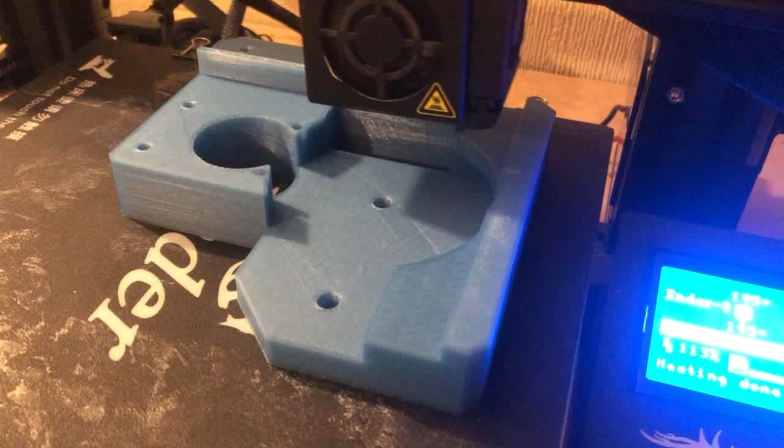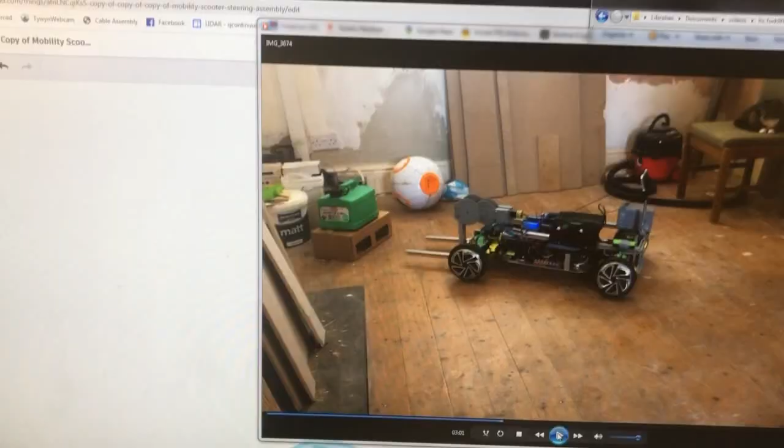Okay, so in this one we're going to be improving the forklift that we had on the last hoverboard video. So as you can see, as it's moving, if we just get to it, yeah, you can see that it tilts and rotates. So it can't place things on top of each other. It can only lift stuff up and move it around a little bit.

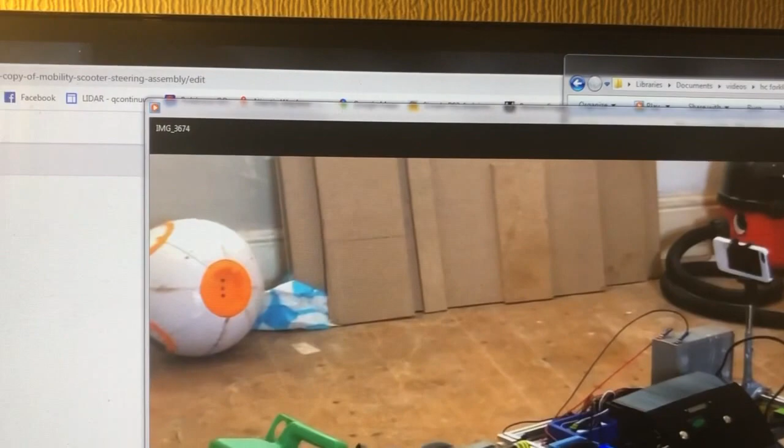Yeah, so as you can see, when you lift things up, it tilts back. You know, that's not how a forklift works. I mean, it depends on what sort of stuff you're going to be lifting. But I want to be able to give myself options. Like, say if I want to stack these things that I'm lifting up, if I want to make tidy piles, that kind of thing.

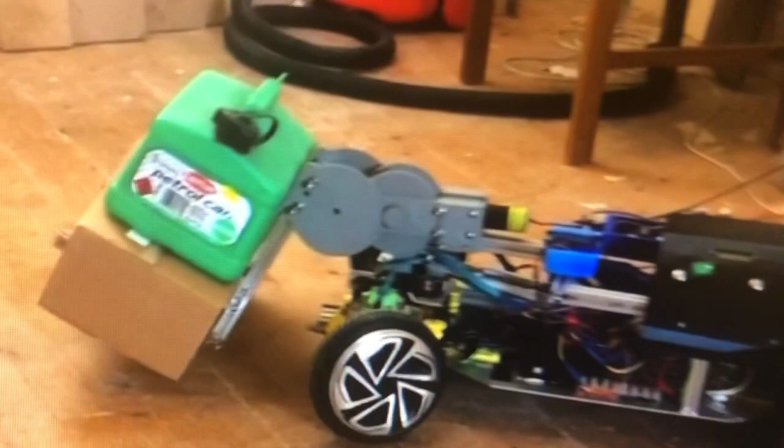So what I've done, I've redesigned the whole of that part there. It's the part that was going to be a robot arm. So basically what I've done, I've converted it into a linear actuator. So if we go on to the design now, and here we go, we'll just pop all these up like that for a nice little animation.

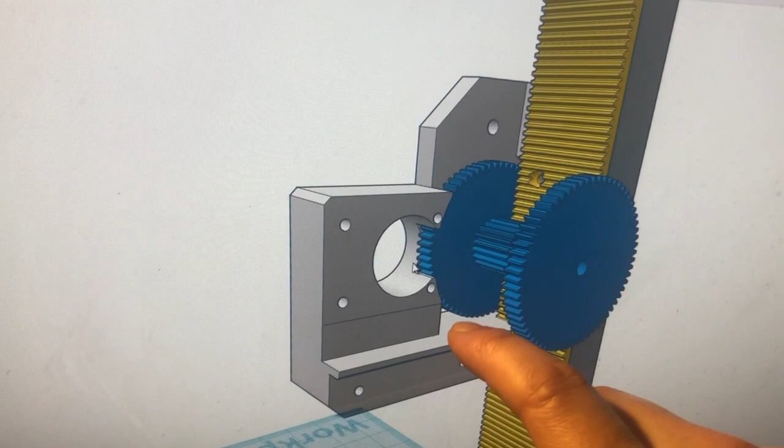Okay, so what we got here, this is like the old bracket there. So that just bolts onto the side of the existing motor. These big wheels, they turn onto the drive motors. It's a dual output shaft motor, so it's going to have both these gears driving on it. And then attached to those big gears, we've got some smaller gears which run along this bar here. So all that piece there, that's the bit that moves. That's the linear actuator part.

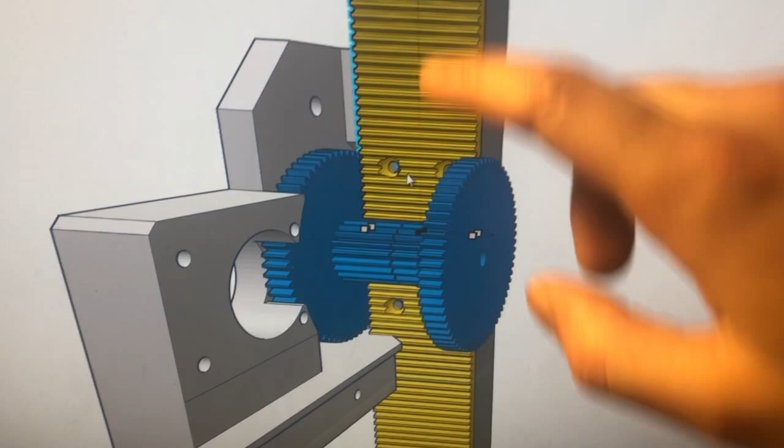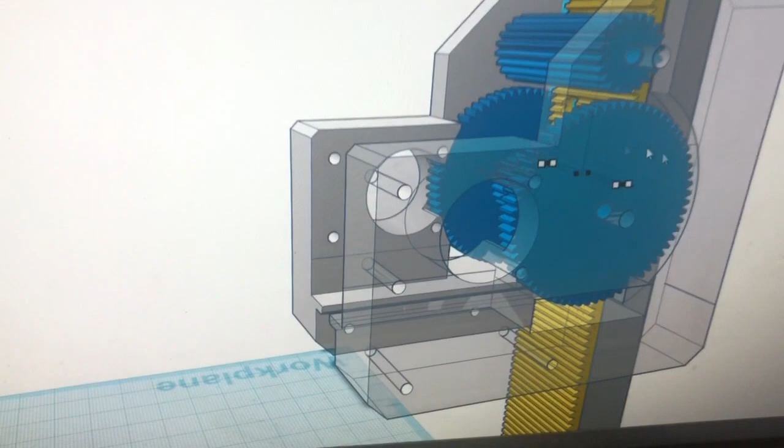So yeah, we got an extra roller here. This is just to stop it wobbling so much. It gives it a little bit more stability, rigidity. And then obviously the other side. Okay, so all these parts, they're going to take a little while to print, so I'll see you in a bit.

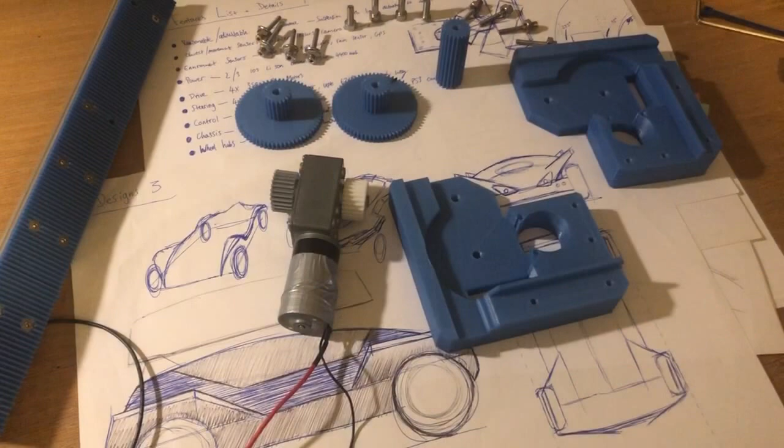Okay, so here is the 3D printed linear actuator forklift attachment parts. So this is going to be called the forklift attachment Mark II. Okay, so Mark I was obviously crap because it went bzzz, like that, and this one's going to go bzzz, so it's going to be a lot better.

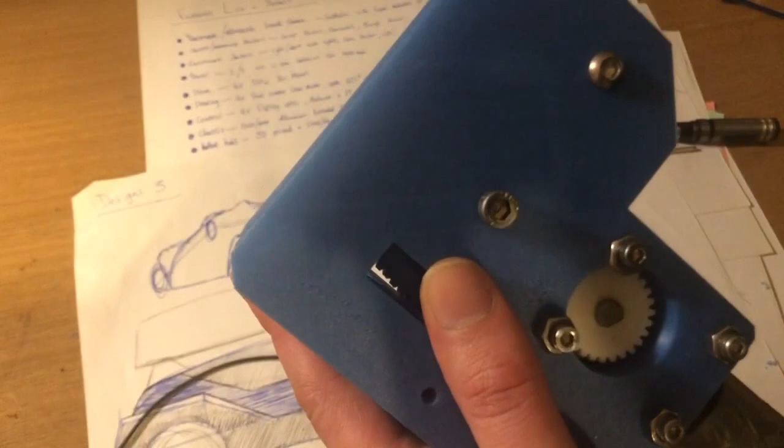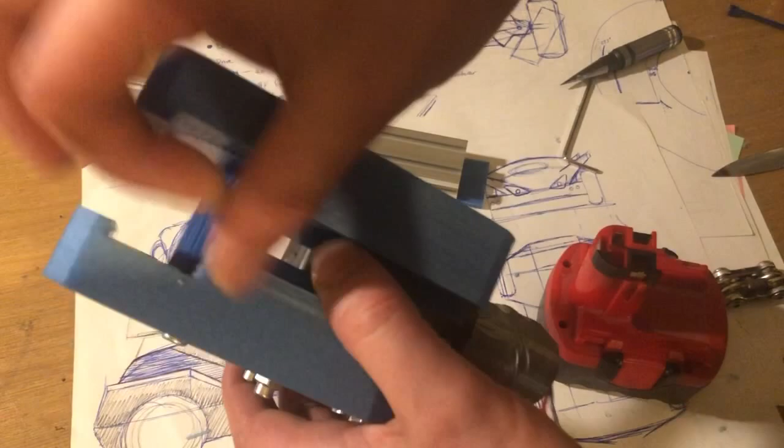Alright, okay, so third time lucky. Alright, so basically all I'm doing is getting the Bosch multi-tool universal cutting thing out, the one that's pretty good for cutting everything, and just basically taking chunks out of this. So it should be okay now. I got 100% confidence that it's going to work this time.

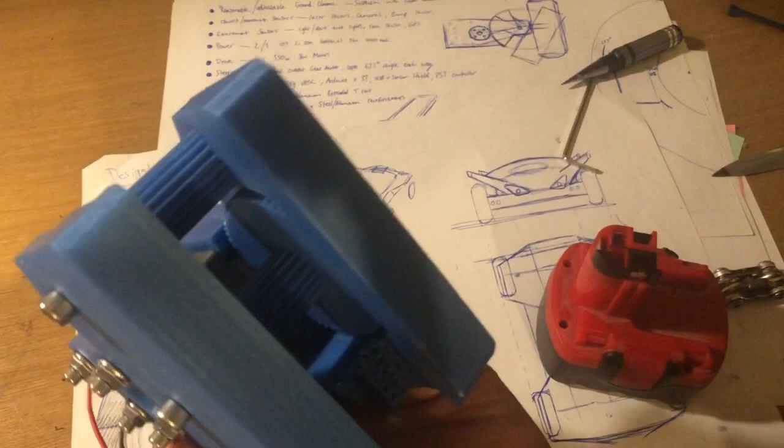Okay. Right, so if it just comes out the bottom, then it's good. Oh yes, look at that, excellent. Cool. Right, so there you go, that's how you make a linear actuator.

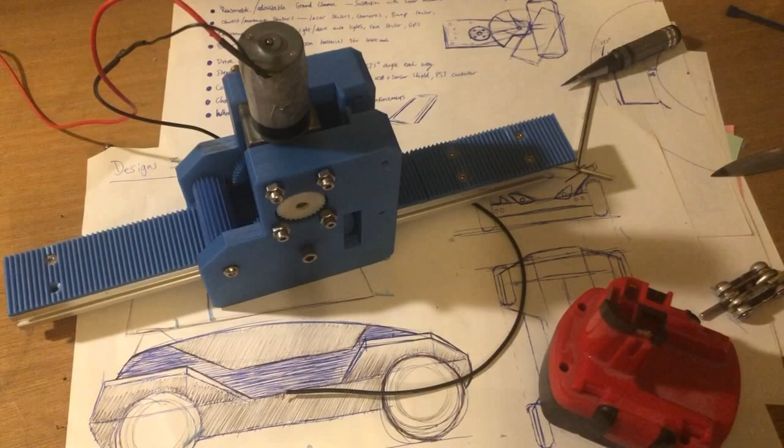So also, you could quite easily mount a potentiometer on here and get quite accurate movements. It might be a bit ambitious to say, but you might be able to get a couple of these and make some sort of milling machine kind of thing. I don't know. I mean, they're probably strong enough.

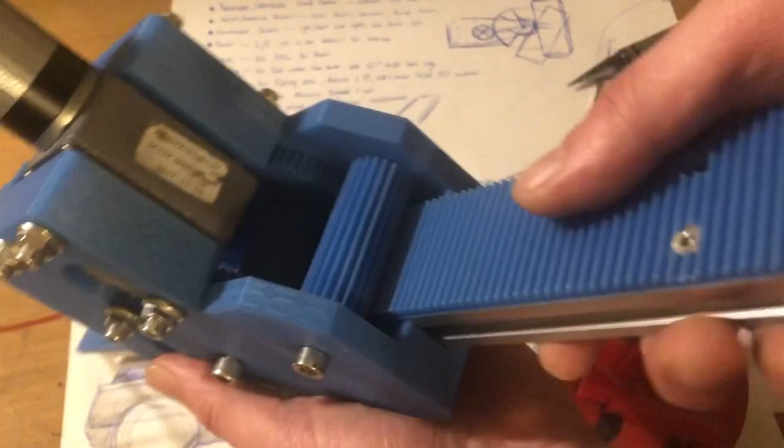Well, apart from the gears slipping, which is something I can fix, it's got a decent amount of power. Like, I can't pull that out. Something's going to break before that comes out. Right, so just got to tighten some of these up, and then I'll be ready for testing.